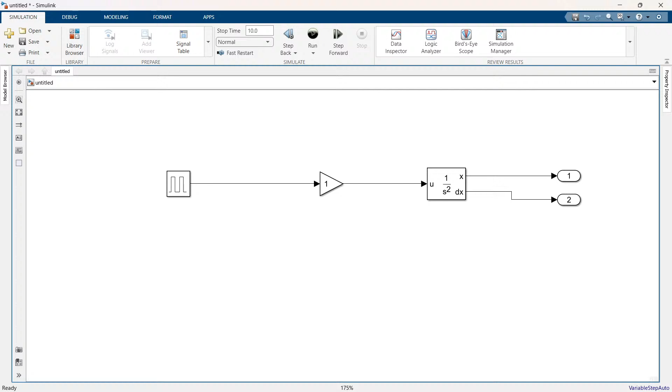So this is my simple logic. What are we going to do here? What is the need of the pulse generator? We are going to generate the square pulse signal by using this pulse generator. That simulates pressing and releasing the gas pedal for my model. When the pulse is 1, it represents the gas pedal being pressed, causing the car to accelerate. When the pulse is 0, it represents the pedal being released and the car is no longer accelerating.

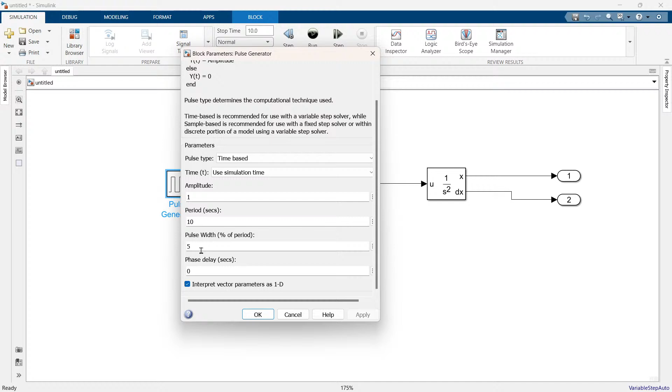Just double click on this pulse generator. You can see the block parameters. What are the block parameters? We have amplitude, that is the height of the pulse. Next is the period, this is nothing but time. And next is the pulse width, that is the on time of the pulse. The pulse width should be represented as a percentage of the period, so that is 5%.

Now I am going to connect the pulse generator to the gain block. What is the gain block's purpose? It can multiply the input signal from the pulse generator by a constant value. So I am going to change this constant value from 1 to 2.

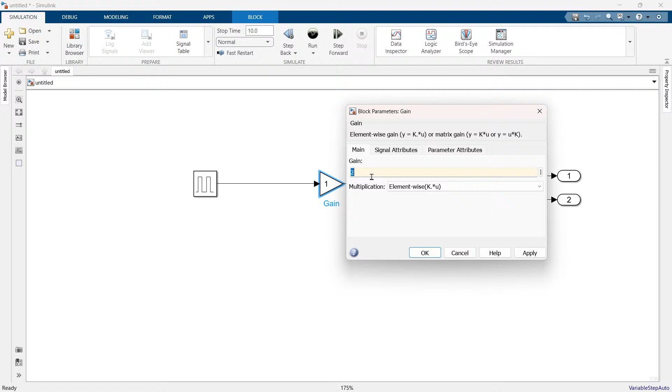Next we have a second order integrator block. What is its purpose? It integrates the signal twice to simulate the car's movement. The first integration gives the acceleration signal that produces the car's velocity, that means speed. The second integration gives the car's position, that means distance traveled over time.

In real life, what is meant by acceleration? It is the rate of change of velocity, so dv by dt, that is nothing but acceleration. And velocity is the rate of change of position. So we integrate the acceleration once to get the velocity, and integrate the velocity to get the position. The same logic applies here, that is why we use the second order integrator block.

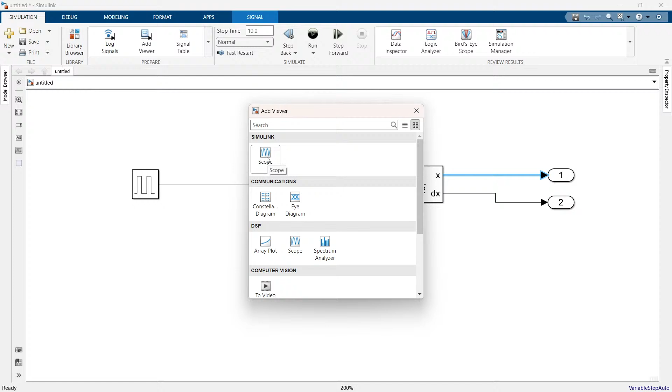So finally we are going to see the output. Now I am going to add the scope here. Just click this line, you can see the add viewer. Just click this one. You can see the Simulink scope, and I'm going to click this scope. You can see some changes in the model. So we successfully added our scope here.

The same way, just click this line and go to prepare and add the viewer. Click the scope. Okay.

So all set. I'm going to tell you the overall simulation logic. When you start the simulation, the pulse generator sends a pulse signal representing you pressing the gas pedal. The gain block multiplies or scales the pulse signal to simulate the acceleration of the car.

What is the purpose of the second order integration? It integrates the acceleration to first give the velocity, then the position of the car over time. So this scope block displays the position output as a ramp, showing that as long as the gas pedal is pressed, the car continues to move forward, and its position increases linearly with time.

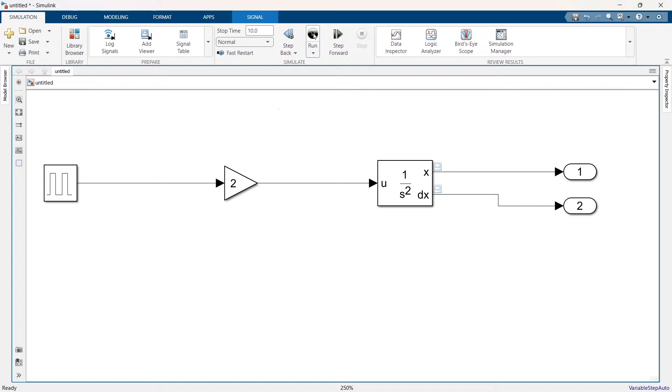So I am going to run the simulation now. Go to this run section, just click run. Let's see the output.

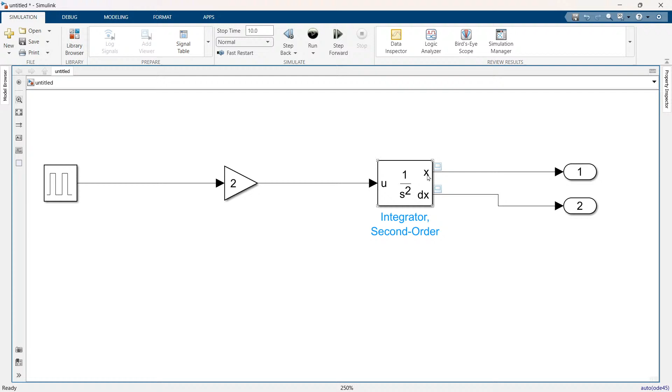So the first waveform is X. What is X? X is nothing but position, that represents the distance traveled by the car. Just click on the scope, you can see this is your output. When you integrate the velocity with respect to time, you obtain the position X, that means distance.

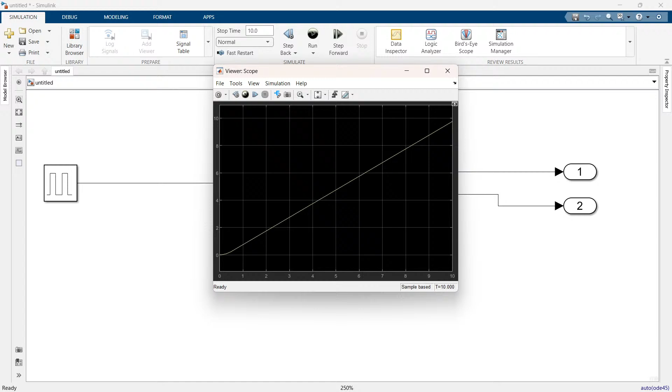The first waveform is a ramp signal from the position, that means distance. This ramp indicates the car's position is increasing steadily over time, which means the car is moving forward. The position increases because the velocity is positive.

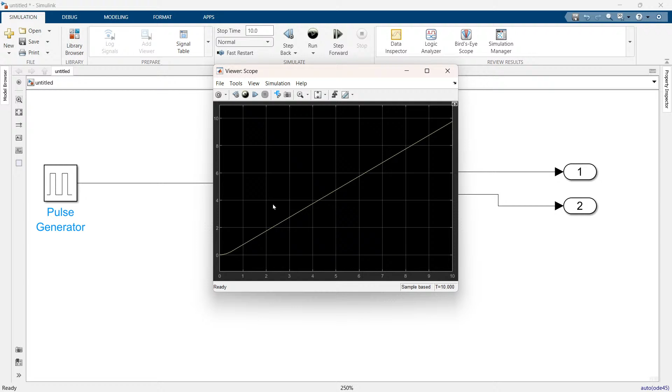I will show you the velocity speed waveform. Yeah, so this is the second waveform, the velocity dx by dt waveform. The initial rise represents the car accelerating from a stop position. When the pulse signal is applied, after the rise, the velocity remains constant, indicating the car is now moving at a constant speed.

So this is the simple model of a Simulink. Do you have any doubt in this? Do you have any doubt? Please mention in the chat box now, and I will explain once again.

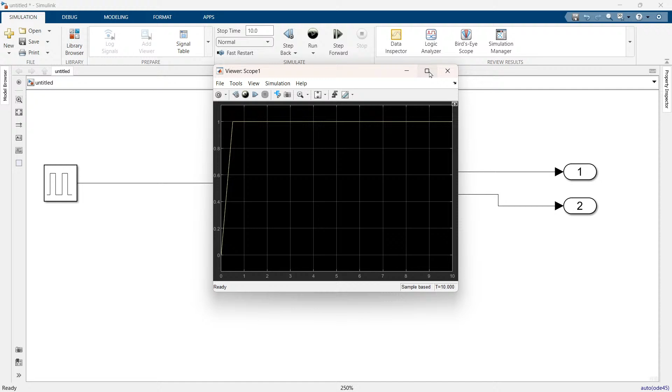Do you have any doubts? Okay. Yeah Shobha, you can check your internet. Windows graphs not visible. Okay, is it visible now?

So you can use a recent version, Suresh, you can use the recent version for that. Okay.

Okay, so let's get into the next one. So this is the Simulink example. Next one is the Stateflow. As I told you, Stateflow consists of state transitions and truth tables, like that.

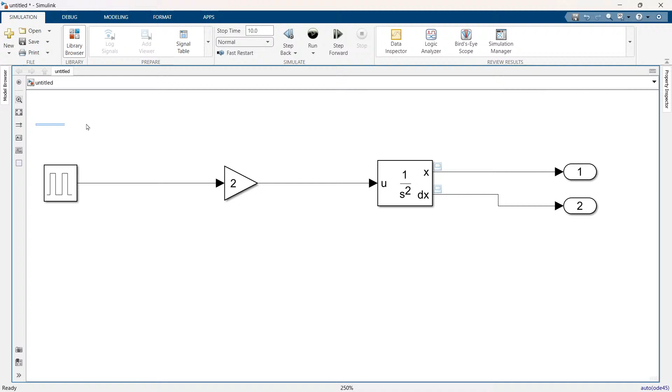So now I am going to give the Stateflow explanation. Go back to our Simulink. I'm going to delete all this and go to the library browser. Sorry, go to the library browser. Just type Stateflow.

So under Stateflow, you can see the chart. Just click on this, add block to our model. So this is the Stateflow chart. Just double click on this. You can see one colored window.

Here I am going to create these states and add the transitions for that state. So here you can see this is the state. From the object palette, click the state icon and move the pointer to the chart canvas. So this is the canvas. Just click on this. You can see this is a state.

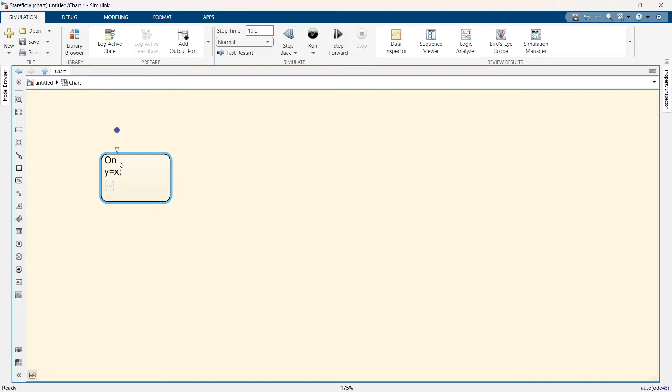So a state with its default transition appears, and this is the transition. Now I'm going to add this one, 'on', and y equal to x, put the semicolon. Next I'm going to add another block, another state, and this is 'off'. Under this 'off', I am going to give the y value as 0.

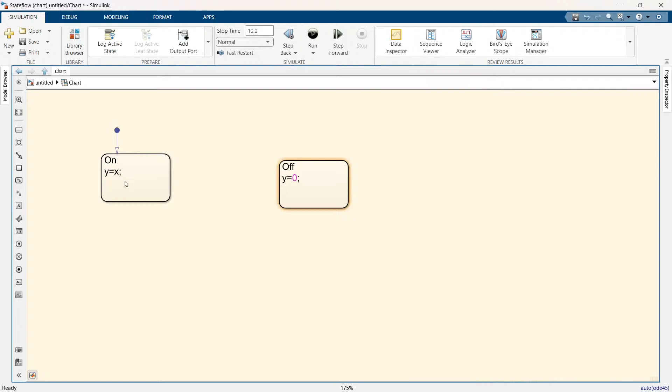Okay, so go back to our session. So this is a Stateflow. Now I'm going to add the transition here.

You can see, just place your cursor on the state. You can see the one arrow, so that is the transition. So I'm going to add the transition and give the condition also. So x greater than t naught, so this is my condition.

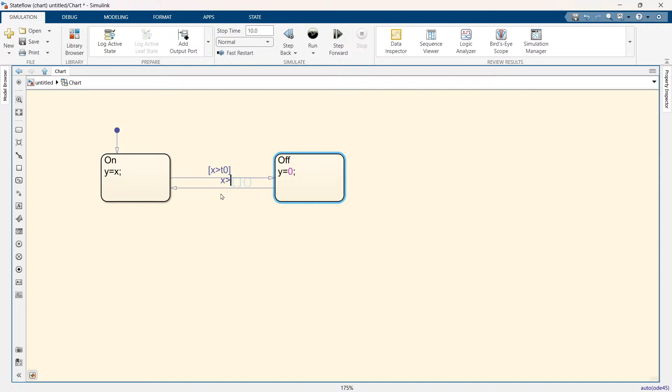And the next condition is, yeah, so this one, that is x greater than equal to t naught. And here I'm going to change the greater than to less than. Okay, so this is my condition.

So now I am going to resolve my undefined symbols in the Stateflow chart. So before you can execute your chart, you must define each symbol that you use in the chart. So you have to specify the scope, for example, input data, output data, or local data.

So for that, go to this modeling tab. Under the design data, you can see the symbols pane. So in the symbols pane, undefined symbols are marked with an error badge. So this is the error badge, that means undefined symbol. So I'm going to resolve that one.

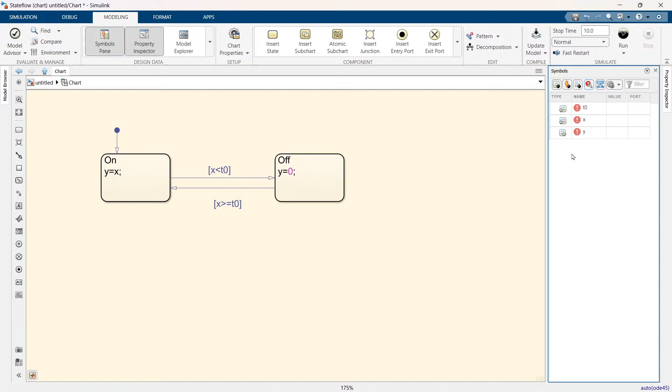So here you can see, just click this one. So it automatically changes the input and output based on our Stateflow chart. So here you can see, this is the type of the data. So I'm going to change the input data type to the constant one. So this Stateflow editor resolves symbol x and t naught as the input data, y is the output data. So x is the input data and y is the output data.

So based on the threshold t naught, that does not change during the simulation, I'm going to change its scope to constant data. So I am going to give the value t naught as 0. Okay, so just close this one.

Go back to our model. So this is the chart. So our chart is ready. So we are going to give the input and we are going to get the output.

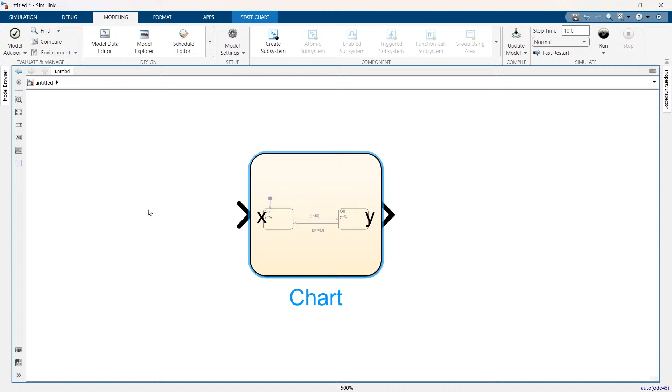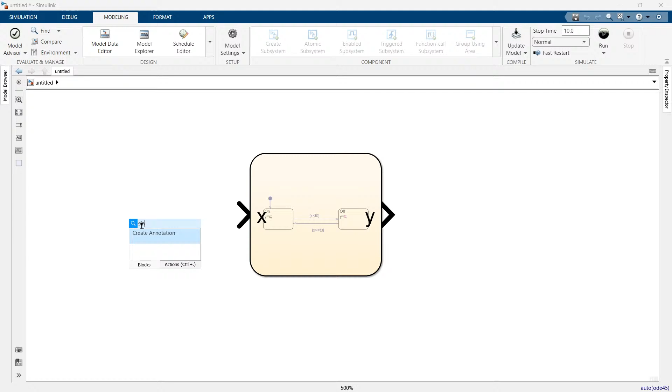So here I am going to give the input a sine wave. So this is my sine wave. Sorry, I need a sine wave block. Yeah, so this is a sine wave.

And the sine wave block, just double click on the sine wave block. You can see the parameters: amplitude, bias, frequency, phase, and sample time. So I am going to give the sample time as 0.2.

And connect the sine wave to x port. And just take the scope, so this is my scope. I am going to connect the input, and also I am going to connect the output.

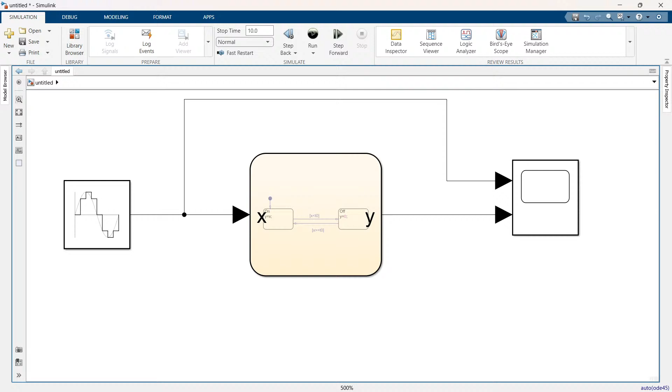So what is happening here? The sine wave block generates the sine wave signal that is labeled as x, as an input, which is fed into the Stateflow chart. So this is my Stateflow chart.

And inside the Stateflow chart, we have two states. One is on state, another one is off state. So in on state, if the sine wave is greater than or equal to the threshold value, the output y is equal to x. So x is nothing but the sine wave value.

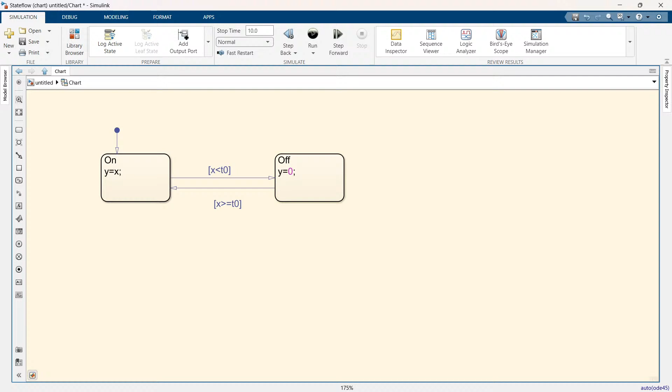And you are taking the off state in the sense, if the sine wave x is less than the threshold value, the output y is set to 0. So this is what my Stateflow. So this entire model is designed to filter out the negative part of the sine wave, which effectively rectifies the signal.

So let's see, now I'm going back to the Simulink model. I'm going to run the simulation. Let's see. It will take time to complete. Okay, so our simulation is ready.

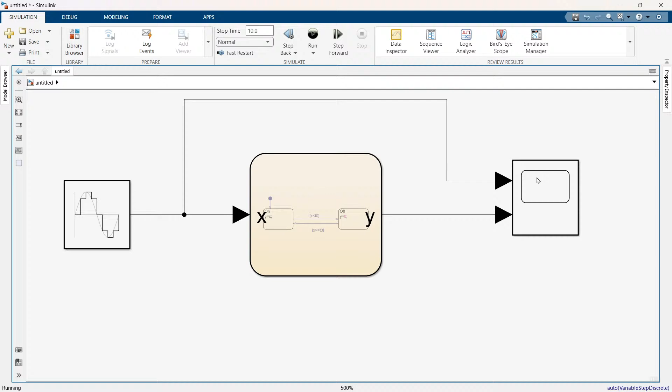So just click on the scope, it will display the output. Okay, so go back, just click the view and select the layout. Yeah, so it perfectly rectifies the negative signal, negative value of the sine wave. Okay, so this is what the Stateflow.

Do you have any doubt?

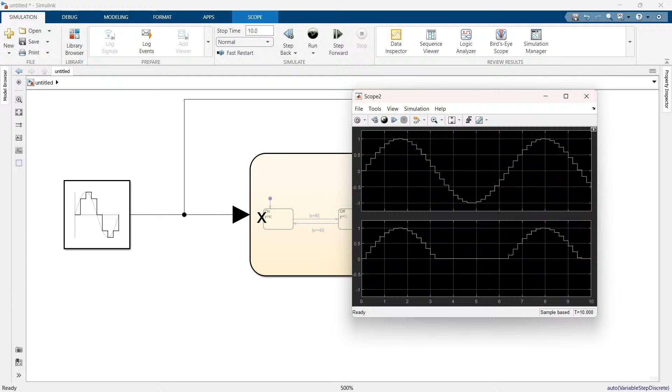So what is happening here? Just click on this chart, you can see now some animation here. So just click this simulation run button. You can see, yeah, so here some animation will happen.

So what is that? That is from on to off. When x falls below t naught, from on to off. From off to on, when x is greater than t naught or greater than or equal to t naught. So this is what the Stateflow.

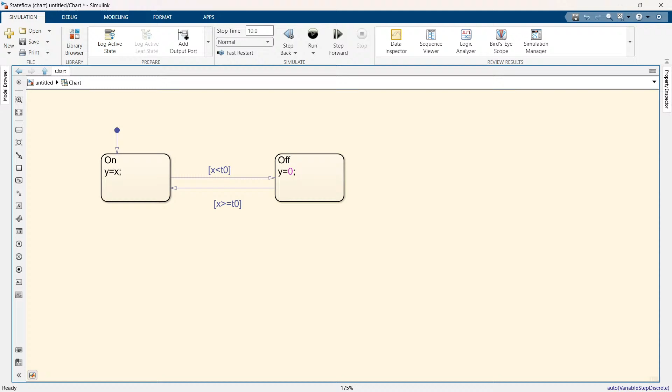So now I'm going to continue the... okay.

Before you enter into power electronic simulations, first you should know the solver. So what is the solver? Does anyone have any idea about this? What is meant by solver? What does it mean?

Okay, I will tell you. Solver is nothing but you are going to solve one equation or solve any problem. Inside Matlab, the entire Matlab software uses the solver. So solver is nothing but our model, our entire model. It can act as one equation and we are going to get the results by solving that equation using the solver types.

That is particularly variable solver and fixed solver. We will get better results by using the solver, that is why we use that one. There are two types of solvers: one is fixed solver, another is variable solver.

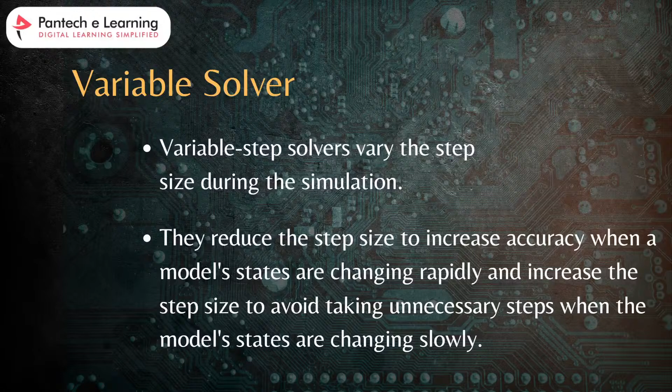Coming to the fixed solver, this fixed step solver solves the model at regular time intervals. That means the step size should be constant here. The step size is the time between each simulation point and that stays the same throughout the simulation. That means constant, the step size should be constant.

So when to use fixed solver, when to use variable solver? If you want consistent timing for a real-time application, suppose if you are generating code from our Simulink model, at that time you can use this fixed solver, that is a very good choice. Or else you can use a variable solver when you want a balance between accuracy and speed and you are not working with real-time hardware.

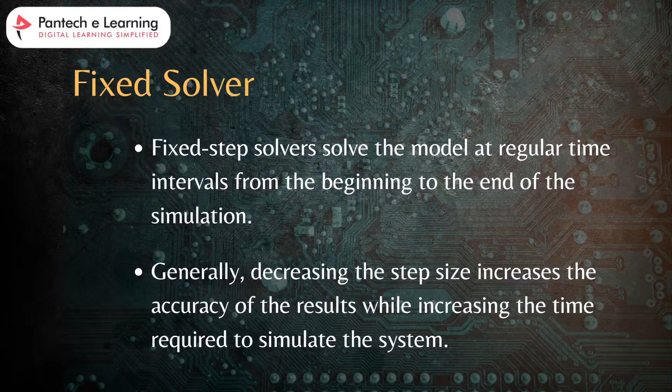So this is the main difference between them. Fixed step is nothing but constant time intervals, that is good for real-time applications. Variable step is flexible time intervals, that is good for faster simulations when real-time performance is not needed. So this is the main difference between variable and fixed.

So I will give you the list of commands used in MATLAB. CLC means it clears the command window, you can enter CLC in the command window to clear it. And clear removes all the variables from the workspace. I will show you, go back to command window.

Just type CLC, here you can see the command window clears. And I'm going to type clear, and that removes all the variables from the workspace. So this is the commands, and here you can see close all, it closes all the figures, and figure means it creates a new figure window.

So next, list of commands in Simulink: sim of a model name, that means you can run the simulation of a specified model using this command. You can run the simulation and open the system using open system, and close the system using close system. Also you can get parameter and set parameter.

So next is the Stateflow commands, that is SF new, which creates a new Stateflow chart window. SF open means that opens a specified Stateflow chart. SF close, that closes a specified Stateflow chart. So this is all about the list of commands used for Stateflow.